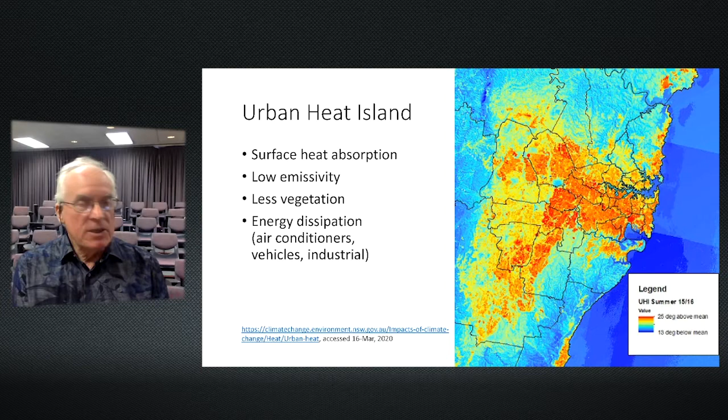Of course, there are many other effects as well - fewer trees, streets paved with materials that absorb heat and don't emit it very well. But the net result is, if you think about Sydney, the temperature in the surrounding area might be 30 degrees centigrade, and it can be up to 40 degrees centigrade in some of those hot areas. But in a city like New Delhi, where the surrounding temperature might be 42 or 43 degrees, the temperature in many parts of the city is up to 48, 49. Even at midnight, you'll find apartment buildings typically at 40, 42, 44 degrees. Very uncomfortable.

Now, there's a big difference between the effects of high temperatures and low temperatures. Low temperatures tend to manifest themselves as extra stress on the cardiovascular system, increased probability of diseases like influenza and pneumonia. So typically the deaths will show up after a sustained period of cold weather of maybe 2, 3, 4 weeks. With heat, it's very different. After 2 or 3 successive days of high temperatures, many people, particularly older people, keel over and have to become hospital admissions, and unfortunately many of them die.

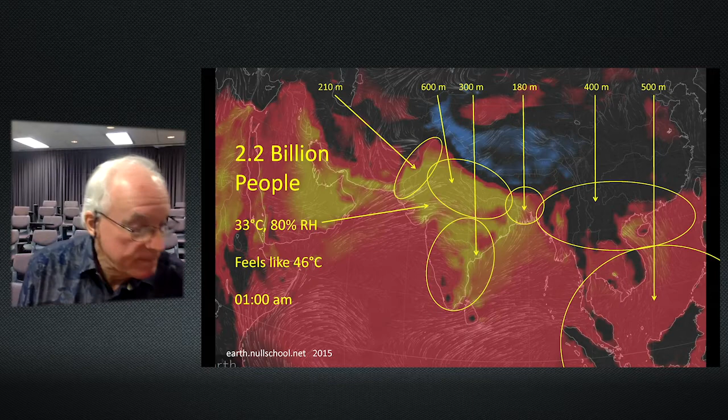The next slide we're on is Warming Predictions, IPCC 2018. This comes from the IPCC report issued in October 2018, and it basically shows you what the projected temperature rise is going to be. They actually give 3 different scenarios. Essentially, what they're saying is that this assumes the world is going to manage to achieve net zero emissions somewhere between 2040 and 2055.

Now, I've been pleasantly surprised that so many countries have signed on to this recommendation, and so definitely progress is being made. I say that because the message has been received not only by a number of governments of leading countries around the world—there are certain well-known exceptions—but particularly by the finance industry. And the finance industry increasingly is driving the decision-making, which is going to make or break the efforts to achieve this target. Certainly some very promising noises.

Now, the next slide shows two additional red lines. That shows the extra half a degree of warming by the end of the century that we will get unless we do something about air conditioning. And the present trajectory that we're on is not very promising. There are some good signs and some new ideas around, but not on a large scale. What is driving the use of air conditioning is, of course, the warming climate, number one. Number two is urban migration.

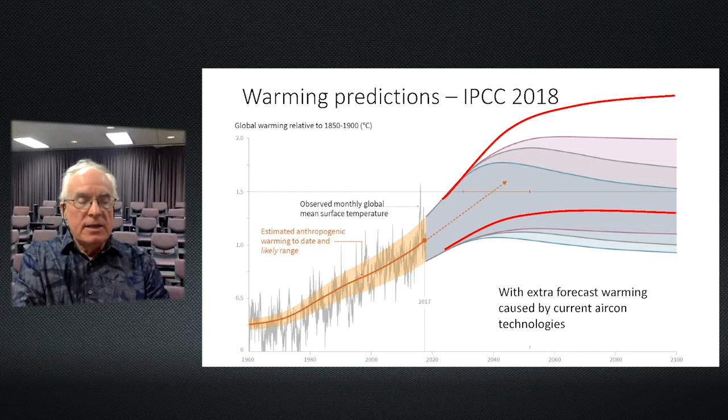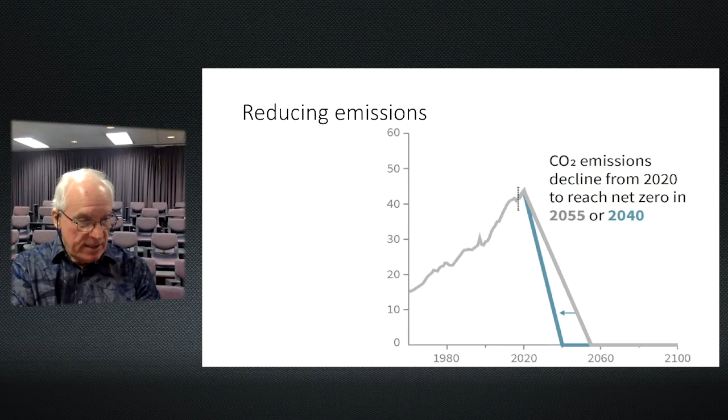So all of this is working on the assumption that we'll be able to make significant cuts to greenhouse emissions rapidly. The next slide shows that—this is reproduced from the IPCC report, and you'll see the steady rise in emissions up until this year, 2020, followed by a steep decline. Gratifyingly, emissions last year appear to have decreased for the first time significantly, and obviously there's going to be a significant decrease this year with economic activity reducing. So maybe we can keep going in the same direction.

Let's hope so. But the point is, as I'm sure you'll understand, we have to have viable solutions. We've got a lot of solutions out there ready to go, but we do need some new ones, as I'm going to explain.

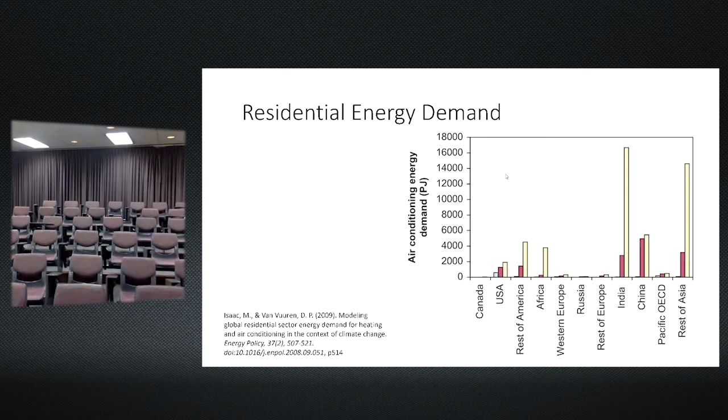So you can see these kinds of energy efficiency improvements are nothing new. We simply need to extend them much further and wider than before—very much an engineering related issue. There's a lot of potential energy efficiency improvements out there. In the past, engineers have had to justify these changes on the basis of economics—you have to present a business case to get a business to make these moves. But now, increasingly, businesses are telling their engineers, go and do it, just find a solution. We want our emissions to come down to zero by 2050, which is a very encouraging sign.

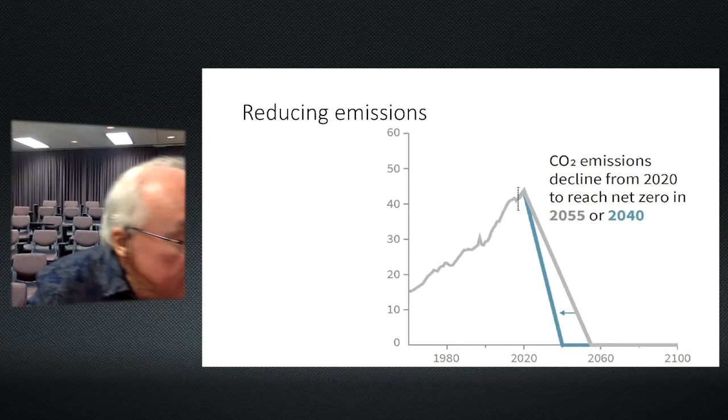Now the next slide, 11, is from a paper which provided much of the data behind the IPCC reports for residential air conditioning. Basically what it shows is that the dominant energy demand, as you'd guess from the map I showed a few slides back, is going to be from South Asia and Southeast Asia. These are the areas where large populations are living in hot and humid climate conditions, and it's that humidity which adds significantly to the amount of energy you need to run an air conditioner—you've got to get a lot of the water vapor out of the air in order to reduce the temperature.

And of course, there are many assumptions behind this prediction, and some of those assumptions are questionable—maybe we could talk about those in the Q&A session towards the end.

However, we need to understand that we desperately need to do something. In response to that, the Rocky Mountain Institute has teamed up with the government of India and announced, in November 2018, the Global Cooling Prize. This has $3 million US dollars worth of prize money, and I think a little bit more has come in since. The idea is to choose—what turned out to be—8 finalists who will demonstrate new technologies.

The aims are essentially to—I'm going to come to that in a moment. Sorry, I should really address myself; I keep looking at the screen and I forget what's on the slides.

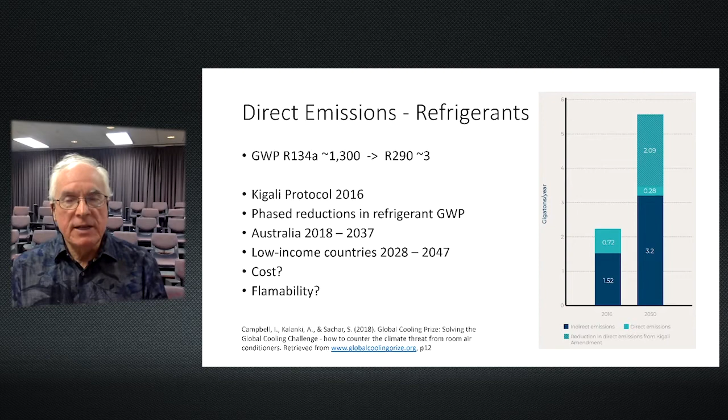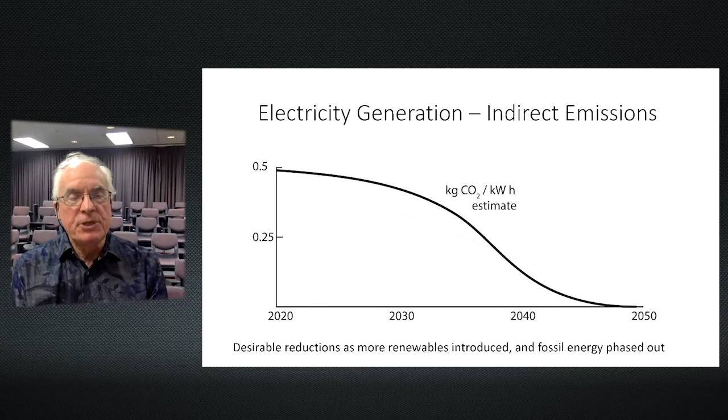We'll see many more of these units because of the need to use these refrigerants. At the same time, we should expect to see a significant drop in the CO2 emitted by power generation stations. This is a desirable trend - it's not an actual forecast, but the idea is that by 2050 we need to be producing electricity without significant CO2 emissions, one way or another.

The global cooling prize - the idea was to come up with a drop-in replacement for a split system air conditioner that would have 5 times less impact on the climate and should not cost more than twice the existing units already on the market.

They've chosen 8 finalists across a spectrum of conventional and unconventional technologies. I'm not going to go into the details yet, I'm happy to answer questions on those, but please bear in mind that new technologies, while always exciting and interesting, typically take around 30 to 40 years from the first public demonstration to the point where they're widely in use.

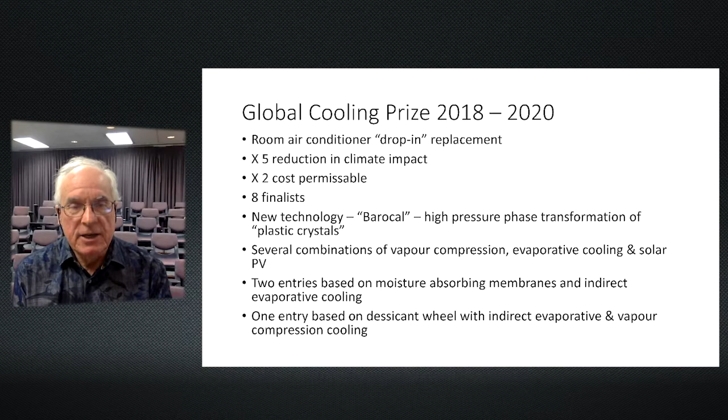We don't have enough time - we have to use existing technologies to get there. New technologies may come along and help, but they're not going to be enough on their own.

So what are the options? Can we get to zero emissions by 2050? I think so, yes, I'm an optimist. It's going to be achieved with many different measures, all of them complementary, working in the same direction.

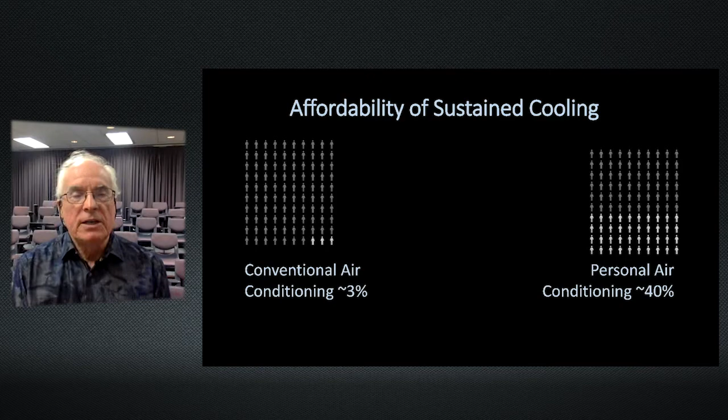And we can do the same across low-income countries today, but you can see that a number of things have to come together. Not only do we need air conditioning, we have much higher temperatures than the Americans. We have buildings that have no insulation, and above all, we have economies which are really troublesome at the moment, in the sense that a huge amount has been invested in education and in creating engineers, but these economies are still not growing in the way that we hope.

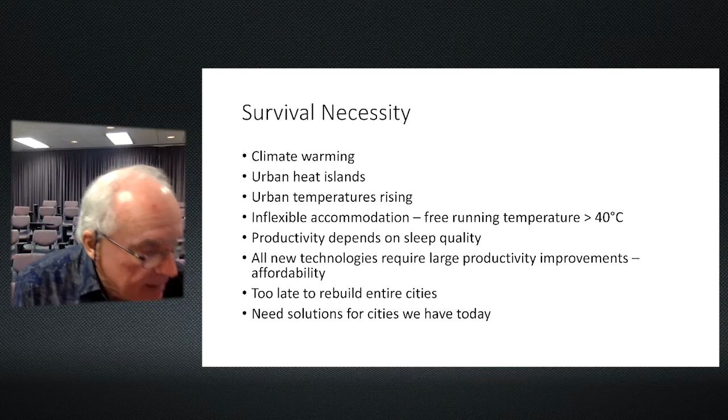So as I indicated before, air conditioning is becoming a necessity in many cities. And I've summarized the aspects that are all coming together to do this: climate warming, obviously, urban heat islands, urban temperatures are rising, the inflexibility of apartment-style accommodation. If you're on the 23rd floor, when it gets really hot, you can't go down to the basement. Productivity depends on sleep quality.

All the new technologies that people are talking about, from phase change materials to Peltier cooling, membrane separation of moisture, and so on, these require massive technological investments, and that's not going to happen without significant productivity improvements. Productivity growth has ground to a halt, and that's a whole area of discussion which I think we'll keep away from tonight, but it's one which I study extensively.

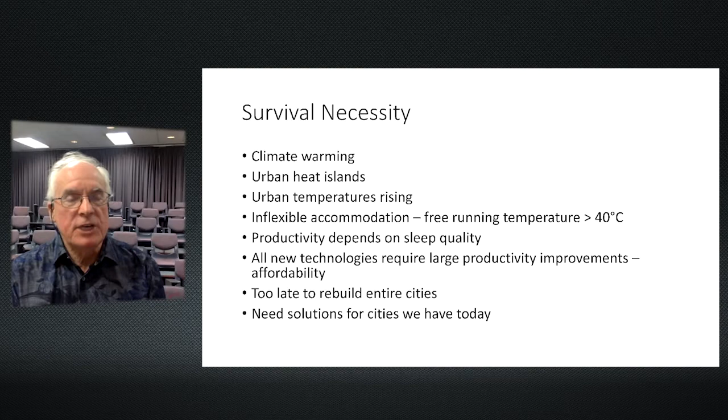There are lots of interesting new building designs that are far more sustainable than today's buildings, and yeah, we will see lots of them being built. But we also have to realize that pretty much all the buildings we see today are still going to be there in 30 or 40 years. Have a look around your cities now, look at buildings stretched back, and see how many of them have been replaced. Not many. It's too late to rebuild entire cities.

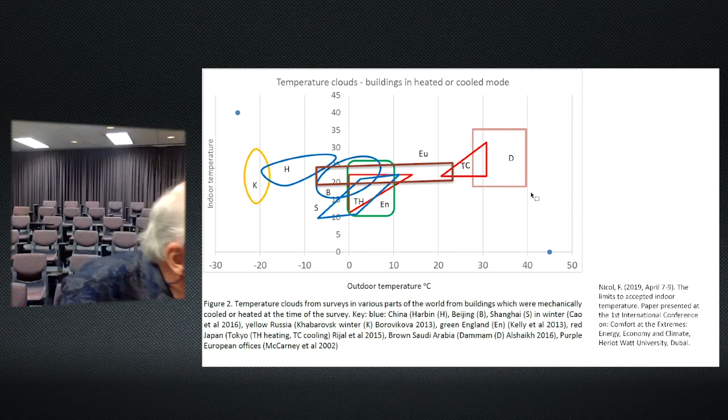Now, here's some really interesting work on thermal comfort. So what is this? This is a slide entitled, across the top—I'm sorry, there's not a proper title—'Temperature clouds, buildings in heated or cooled mode,' and it's slide number 24. These are the preferred conditions that people have in different parts of the world with different ambient temperatures. The ambient temperature is across the bottom.

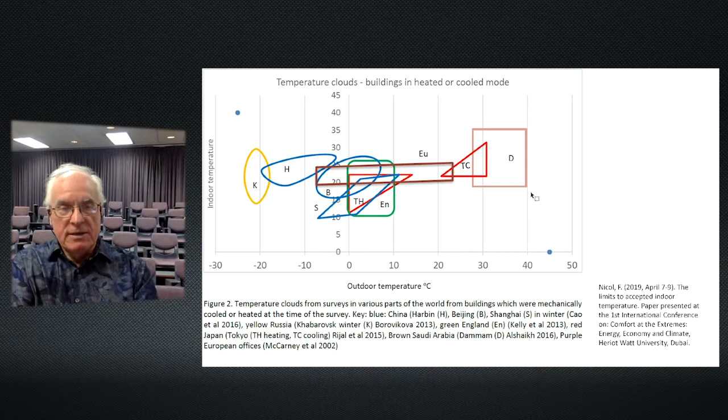On the right-hand side, we see really hot environments around 40 degrees. And on the left-hand side, we see really cold environments down to about minus 20. So obviously, northern China is on the left and Saudi Arabia is on the right. What do we learn from this? When people can regulate the temperature of the building to whatever they want, they will choose the same temperature. They all want to be at a temperature between 20 and 30 degrees. And that's a really interesting finding, and it's something new.

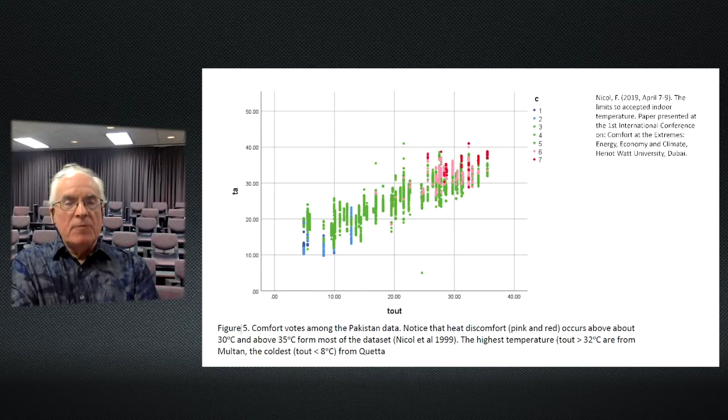Here's data from 1999, taken in Pakistan, that shows exactly the same information: the ambient temperature across the bottom, T-out or T-outside, and the internal temperature on the left-hand side, the vertical axis. And we see here that the population—what it shows is green dots if people feel comfortable, red dots if they feel too hot, and blue dots if they feel too cold. And what that tells us is that people, before the age of air conditioning, when buildings didn't have air conditioning, people adapted to high and low temperatures.

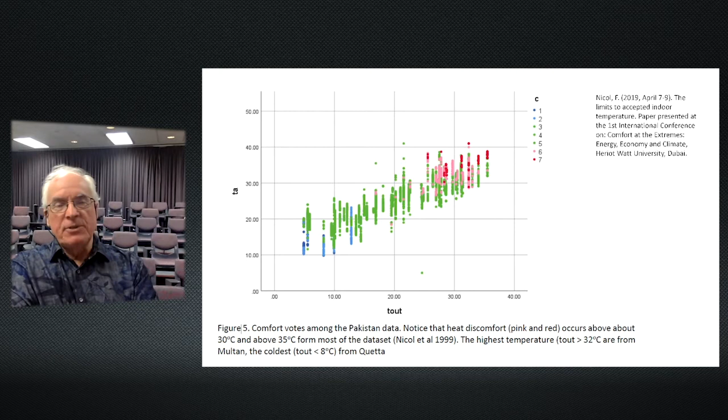They felt comfortable at temperatures which air-conditioned populations would sit there freezing cold at, partly because they put more clothes on. And in summertime, they wore less clothes and did sensible things to keep cool, like drinking lots of water and using ceiling fans, and were quite happy in temperatures up to 30, even 35 degrees, which people who are used to air conditioning would be shuddering at the prospect of surviving.

So what we're seeing here is that people adapt. Now, some really interesting work has come out of admittedly small studies of adaptation. Most of this work has been on sports people who are going to compete in the Olympic Games where it's going to be very hot. So one of the big questions is, how long does it take for athletes to adapt? But some really interesting things have come out of these studies.

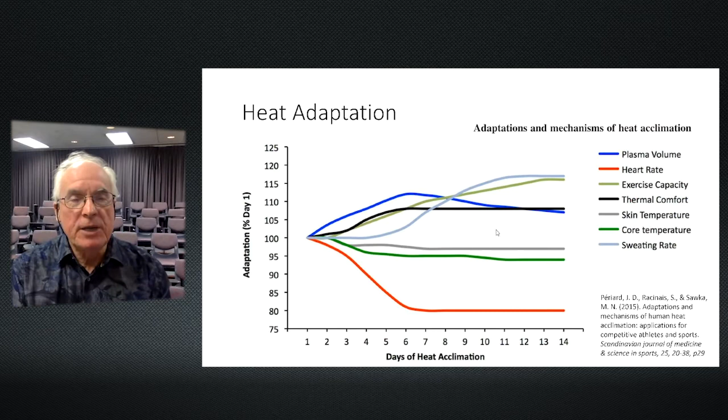What it shows is that people who live continuously at a constant temperature in an air-conditioned environment day and night lose a lot of their ability to adapt. They lose cardiovascular condition. And so this idea of sick building syndrome - people who work in air conditioned offices during the day and are air conditioned at night - they really do get sick because they're losing their ability to adapt. This could be a very significant health issue as more and more people are subjected to these conditions. What it also shows is that pretty much everybody adapts to a new temperature environment in a period of about 6 or 7 days. It doesn't take that long.

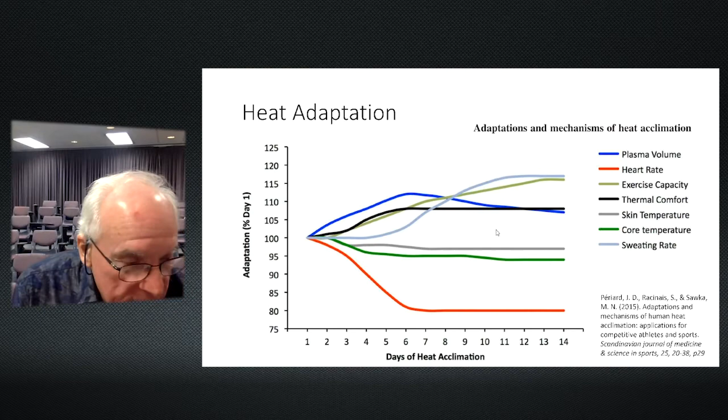Now I'm going to show some of the solutions that are emerging. First, at the cold end. This is work that's been done by a friend of mine, Peter Meurs, who used to be with Fortescue Metals Group here in Western Australia.

He has been supporting a project in Mongolia to build properly insulated yurts with very tiny electric stoves. The combination of insulation and localized heating has dramatically reduced electricity consumption. The motivation for this project was in fact a health issue caused by extraordinary levels of pollution from coal-fired power stations, which generate pretty much all the electricity in Mongolia, particularly in the capital, Ulaanbaatar, resulting in very, very high death rates. So this was a project to show how traditional architecture can be adapted to achieve astonishing reductions in energy demand.